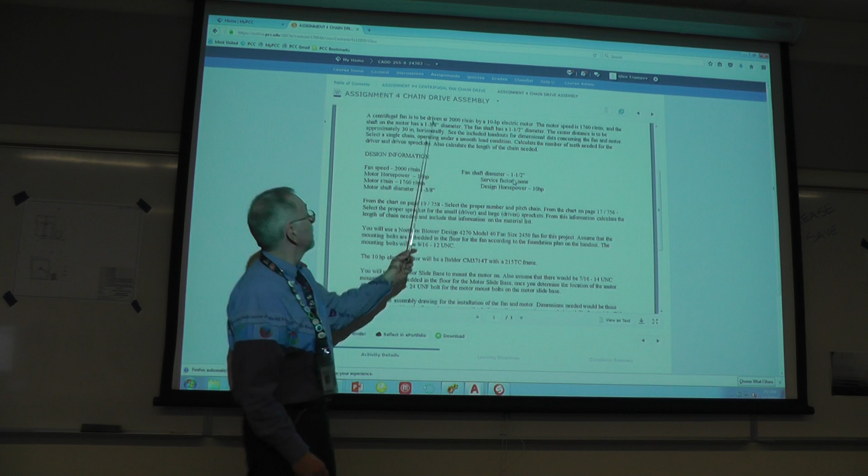Now, the fan is driven at 2,000 RPM. The motor is 1760. Which shaft operates faster? The fan shaft does. Which shaft gets the smaller number of teeth? The fan shaft will.

This is out of the ordinary from most design situations where the motor is running much faster than the piece of equipment is. So we're taking the motor and we're increasing the speed for the fan to get it up to its proper operating speed. So the small sprocket goes on the fan shaft. Other than that, it's just straightforward stuff.

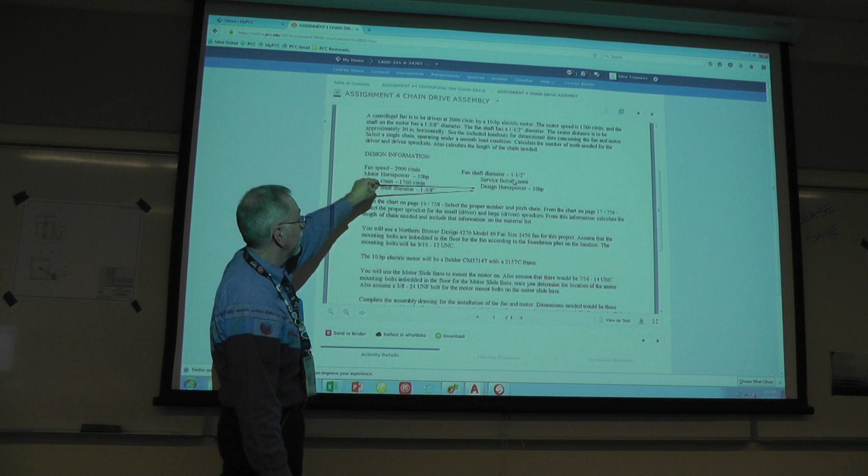So here's the design information set up for you. There's no service factor. The design horsepower is 10. There's no adjustment to that. So you've got the charts to work off of.

Now, originally when I had this project going, I had everybody do the drawings based on the dimensional data. That's not an uncommon thing for you to do as a drafter, to get a catalog of a piece of equipment and make a reasonably accurate drawing of the piece of equipment and the fan. To take stress off your life and probably stress off my life,

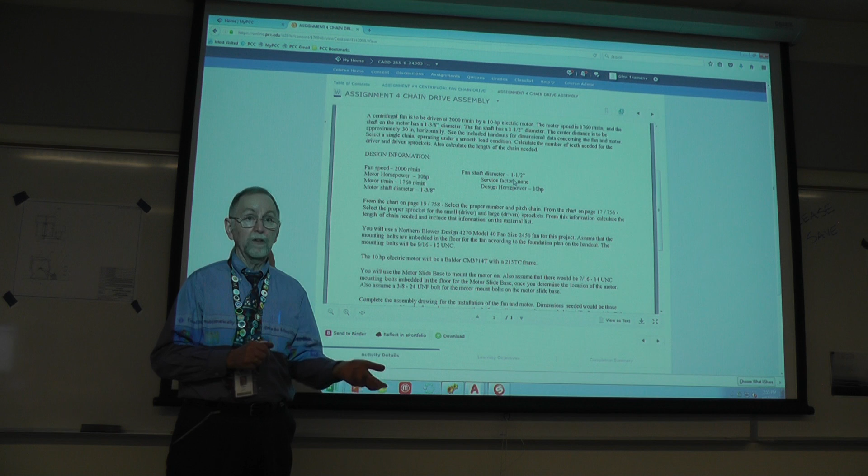I am going to give you, once again, the drawing of the assembly of the fan and the motor, and you're going to fill in the blanks, calculating the number of teeth in the sprockets, adding those to a bill of material, completing the bill of material based on certain assumptions that we've made. I'm going to go through and show you what you would have worked with as a drafter, and how complicated it can be sometimes, and I'm just trying to make your life easier. You're welcome.

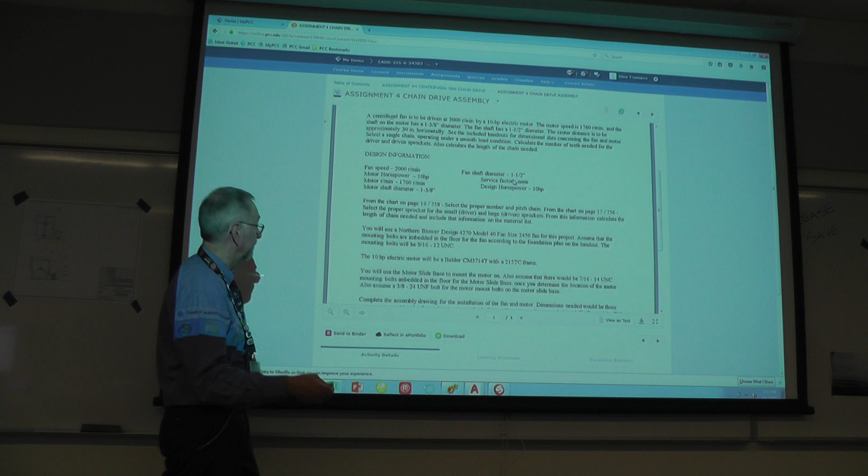All right, so there's a particular model number and fan size number for the project. We would have made an assumption that the mounting bolts for the fan were already in the concrete floor where this fan was going to be situated. There was dimensional data to do that. So I could have taken the dimensional data from the fan information, made an installation drawing, and marked out where the bolts were supposed to be. So we make that assumption.

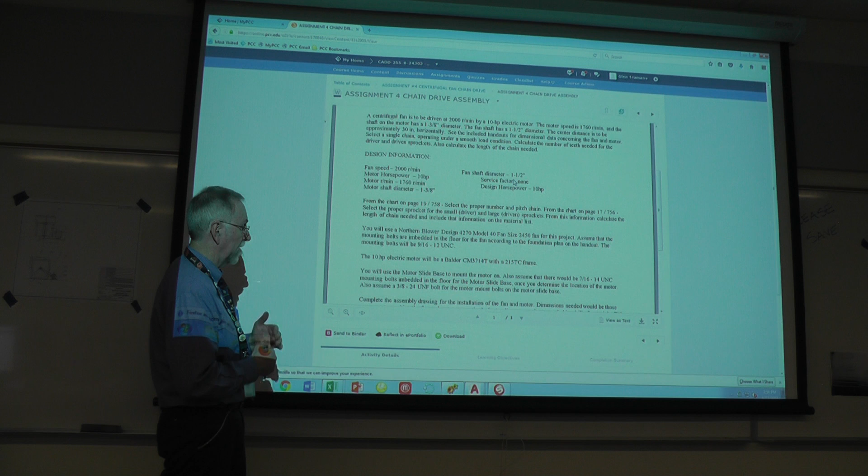The 10 horsepower electric motor is a certain brand and certain model number, and it has a certain frame associated with that. There was also a motor base to mount the motor on, and we could assume that there would be 7/16-14 UNC mounting bolts embedded in the floor for the motor slide base once you determined the location of the motor, and then a 3/8-24 UNF bolt for the motor mount bolts on the motor slide base also came with the motor base. That was information that was included in the catalog.

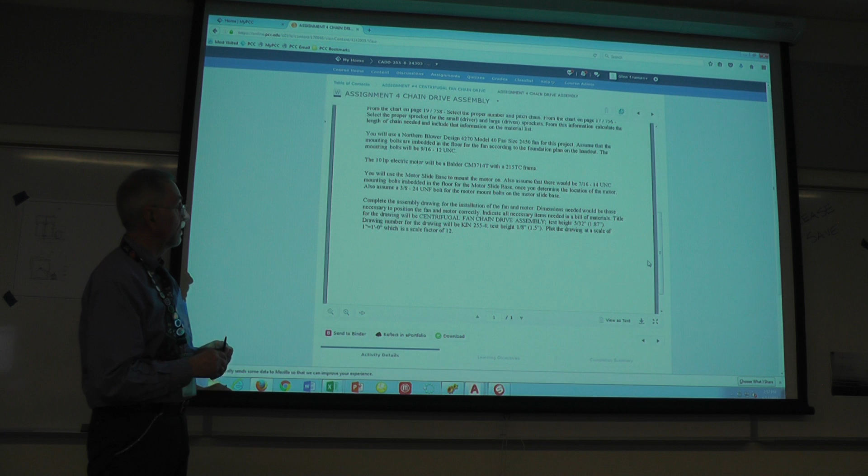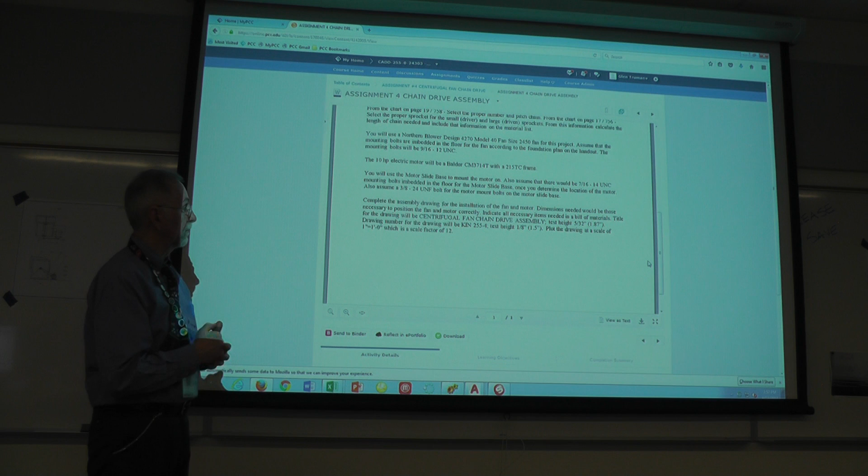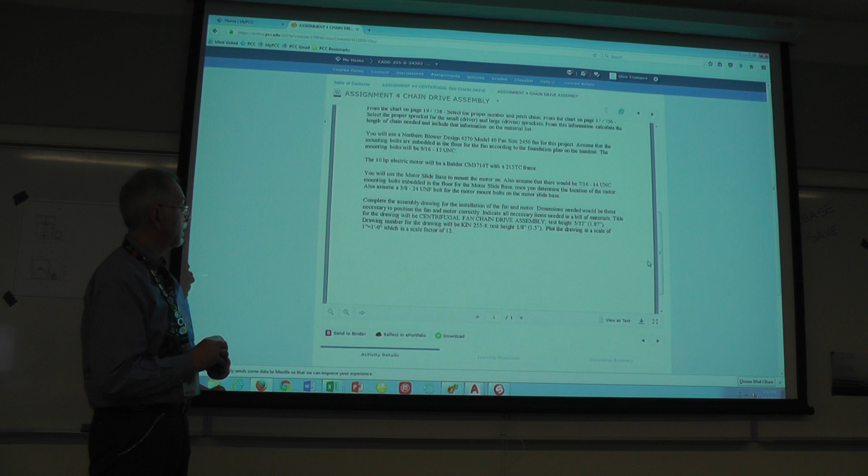So your task is then to complete the assembly drawing for installation of the fan and motor. Dimensions needed would be those necessary to position the fan and motor correctly. Indicate all necessary items needed in a bill of material. Title is going to be Centrifugal Fan Chain Drive Assembly. The text height is 5/32 of an inch, standard for this class for this term. Drawing number is going to be KIN 255-4. Text height for the drawing number is 1/8 inch. Plot the drawing at a scale of 1 inch equals 1 foot, which is a scale factor of 12.

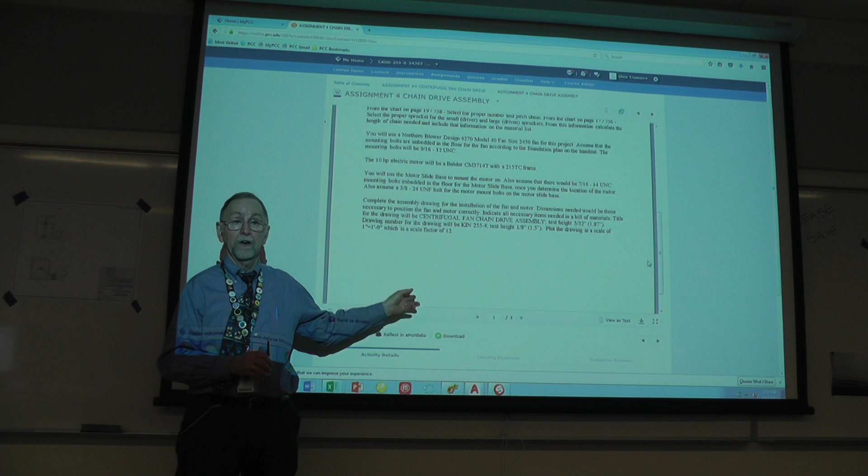Now we're back to a discussion of, do I want to do all of this in model space? Or do I want to take the existing drawing that you'll work from, use that, and do insertion of the title block in layout space? I'm leaving the decision up to you. I've gone through that discussion, and it should be pretty much the same except for the scale factor. Scale factor on the first one was 4. This scale factor is 12. Diameter of the item balloons is 5/16 of an inch.

0.3125 multiplied by 12 gives you the diameter of the item balloons that would exist on the drawing in order for them to plot out at 5/16 of an inch height. Height of the text in the bill of material is 0.1. You multiply that by 12. You actually get a height of 1.2 if you put the title block into model space and fill the bill of material in model space.

If you insert the title block in layout space and fill it in layout space, the height of the text is 0.1. Some people like to do it that way. Other people want to do the scale factor. You need to be able to do it both ways. You might end up working in a company that doesn't have AutoCAD 2017, soon to be probably 2018. You may be working with AutoCAD 2008, and it doesn't do annotative and it doesn't do all that kind of stuff. You need to be ready to do some scale factoring.

Plus, if you're looking at particular sizes and distances in model space, you have to then multiply that by your scale factor of your drawing scale. Otherwise, it's going to be little teeny tiny offsets or something. So you have to be aware of all that. That's why we're doing bigger drawings in this class.

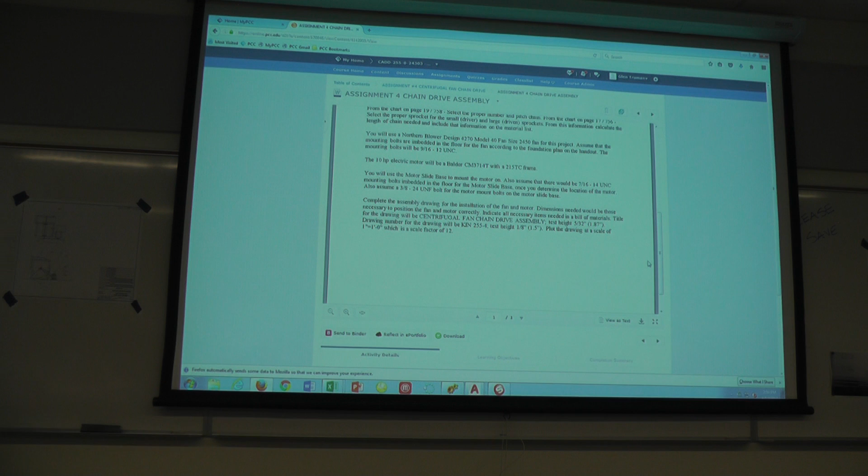All right. There is a PDF of what the drawing will look like. That's down at the bottom where it says chain drive assembly and a PDF symbol. I'm only going to show you these because this is what you would have worked with or might work with as a drafter. They're for your information. These have already been drawn as an AutoCAD drawing that I'm going to have to make available to you. I didn't put it in there. I will get that in.

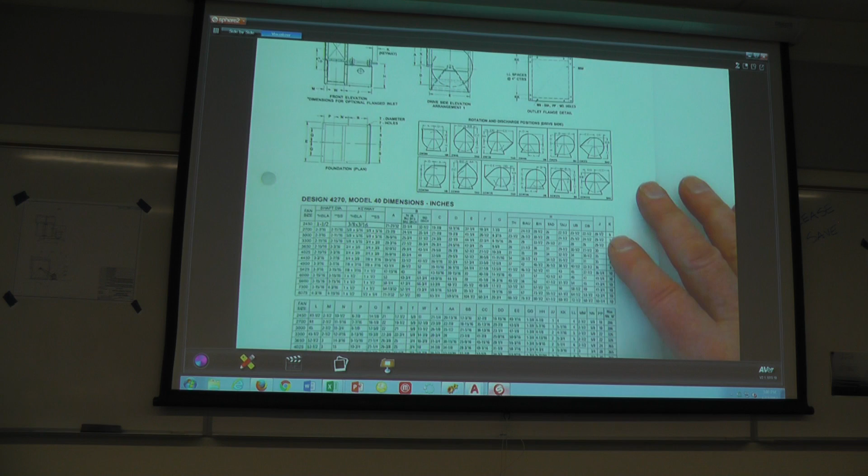Okay, so if I actually looked at the information on a chain on the fan, I've downloaded that, put that in there, and it ends up looking like this. Catalog page. Yep. Looks like this. So there's different configurations. So I've got a lot of letters. I would be using the 2450. There's a shaft diameter. There's a keyway in this shaft that's 3/8 by 3/16.

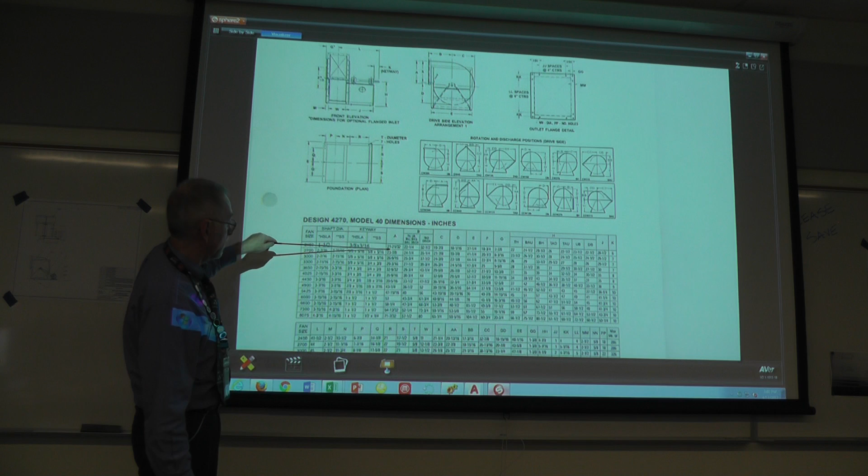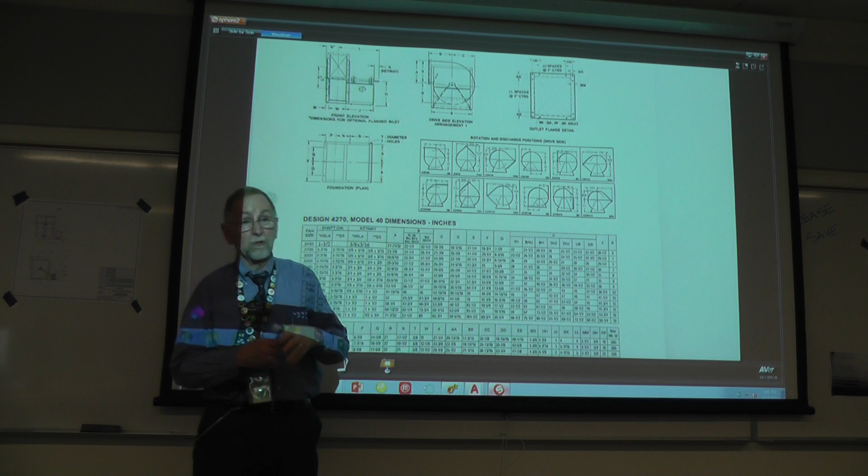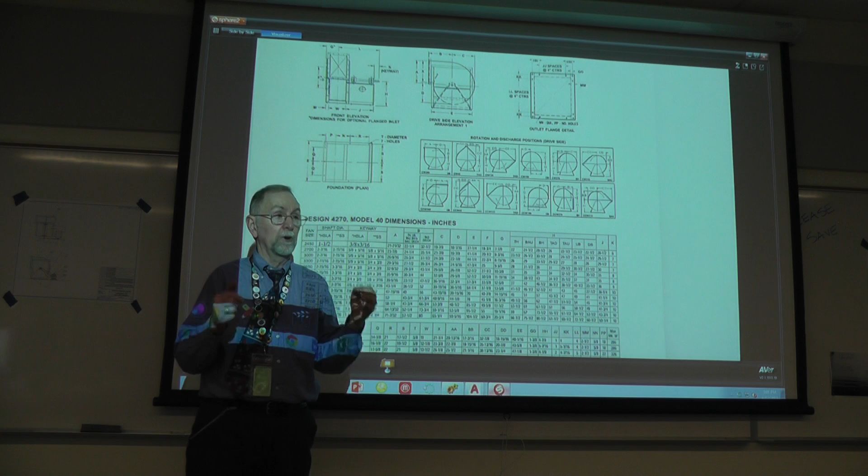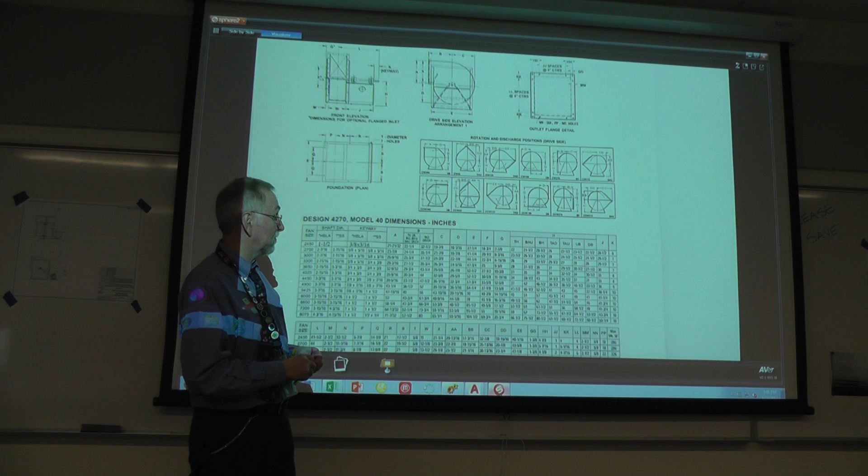There's a dimension A. So I would have to take this dimension A, and I'd have to do a drawing based off of that 21 and a half inches to be able to draw the drawing. I'd have to look at the E. It didn't really tell me how big the little angle iron brackets were, so I'd have to kind of scale some of that drawing or call up a salesman and ask him, hey, what's the size of this angle bracket that I'm maybe using in this drawing? That's what made this particular project somewhat complicated, and everybody took a lot of extra time and frustration and anxiety and angst. So it's been done. But this is what you possibly would have to work with on that.

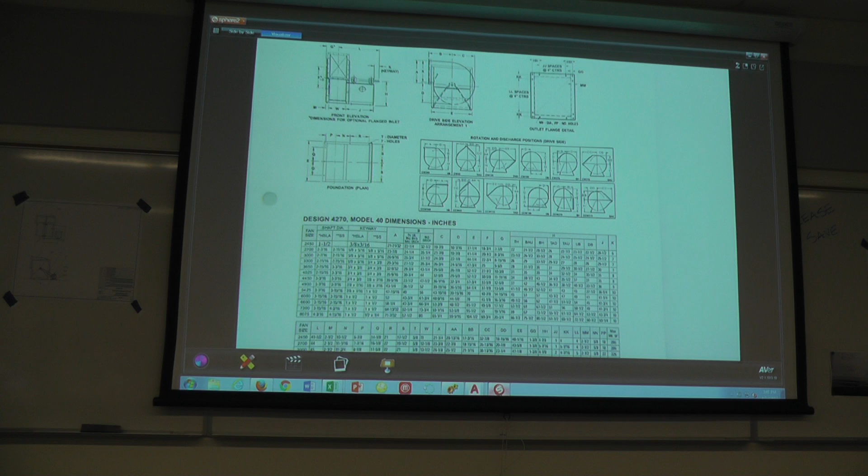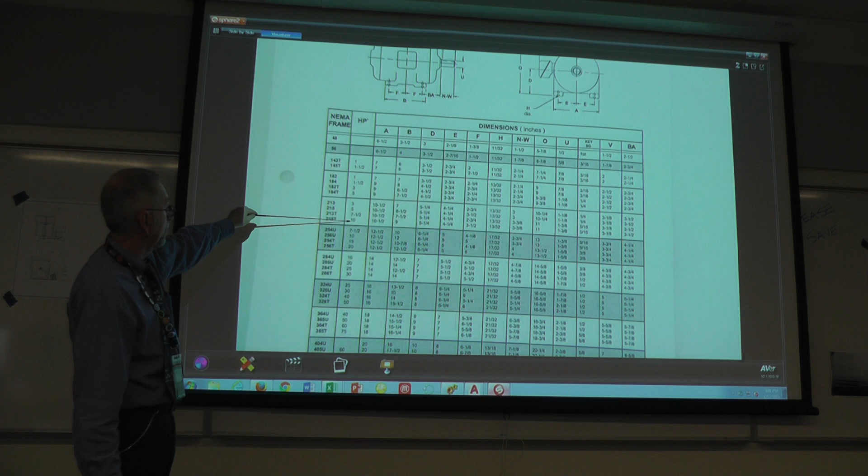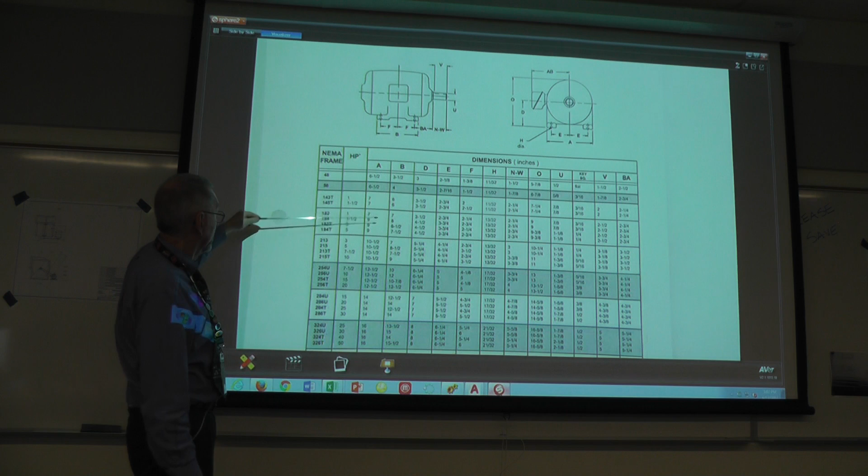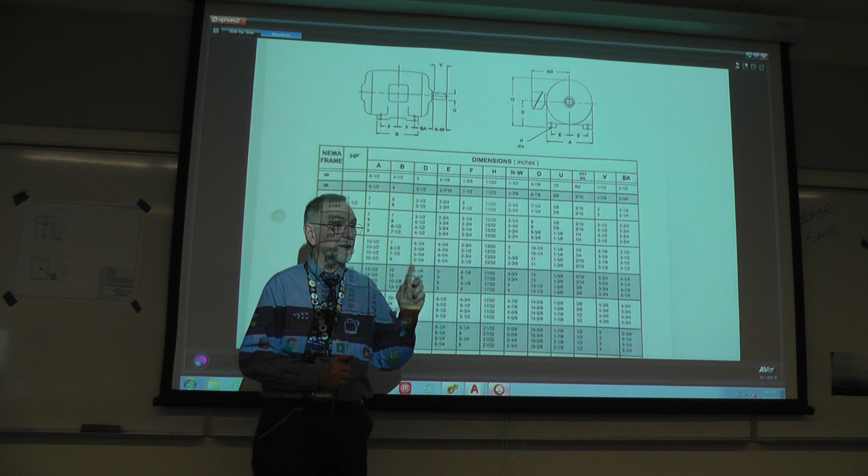There was also some basic information on the frame of the drawing. It was a 215T frame. So I've got dimensions. Horsepower was 10. I got a dimension for A. This is what I would have to use to try to draw as reasonable a facsimile of the motor as possible. I'd have very limited information in here. I'd have a few basic dimensions. I'd have to do the best I could to come up with a drawing. Or I go to Baldor's website and I see if they have a 3D model of a motor, which they did.

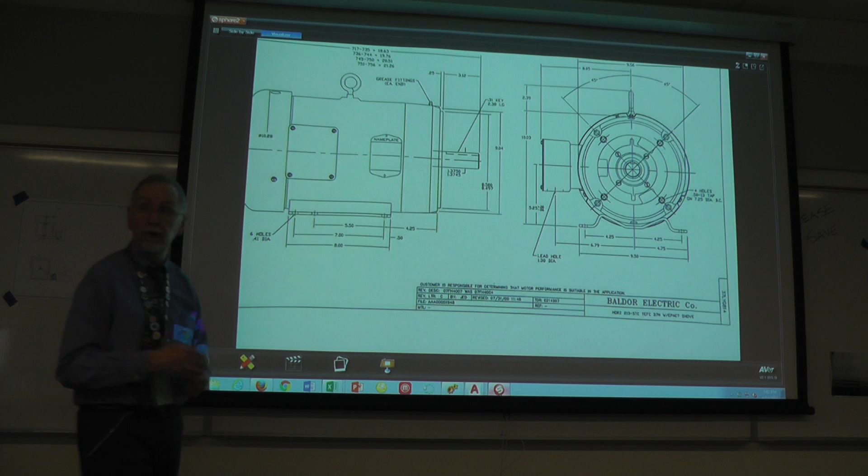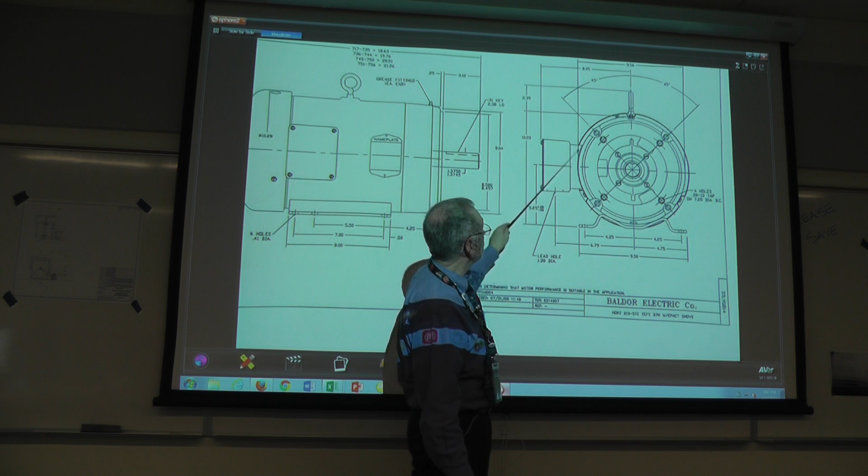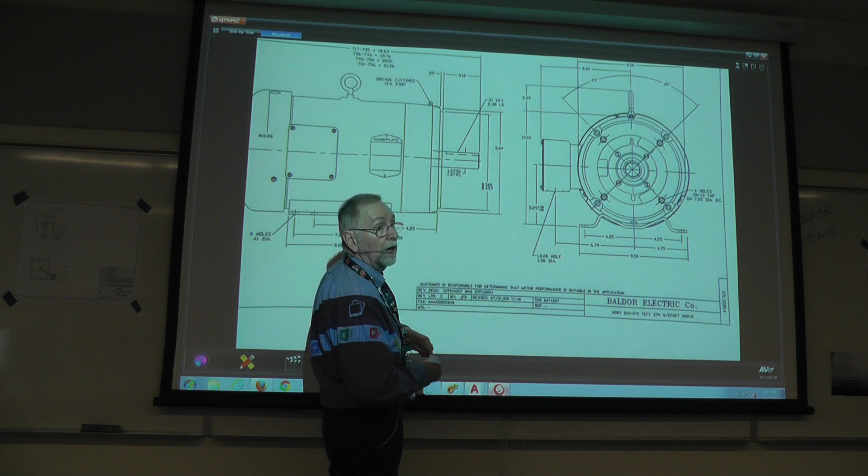And on their website, there was an actual AutoCAD drawing that was downloadable. So I went in and I'm going, well, there's an awful lot of detail in this end view here that exists in my drawing. And by the time I add some line weights into here, almost all that detail is just going to basically disappear. It's going to be this big blob of black ink. So I went in there and took out a lot of this extraneous detail and used just the basics of it for the drawing. And I kind of use this to try to come up with a top view. Here's your shaft diameter, 1 3/8 of an inch. So I've got dimensional data that I could use for that.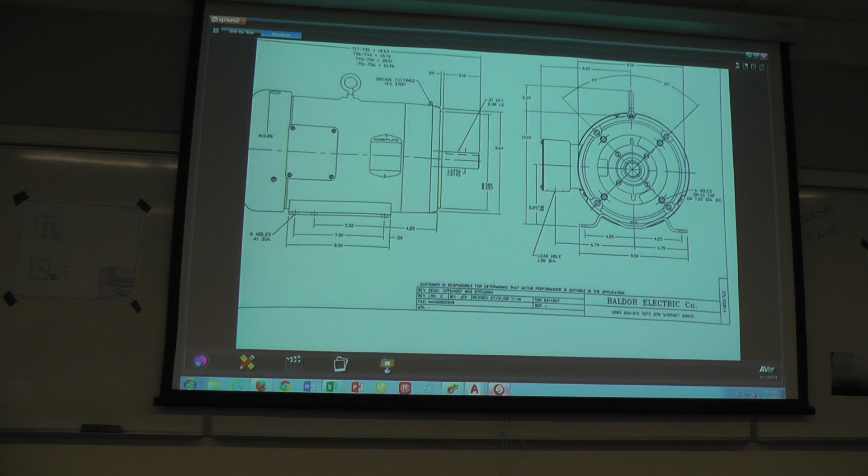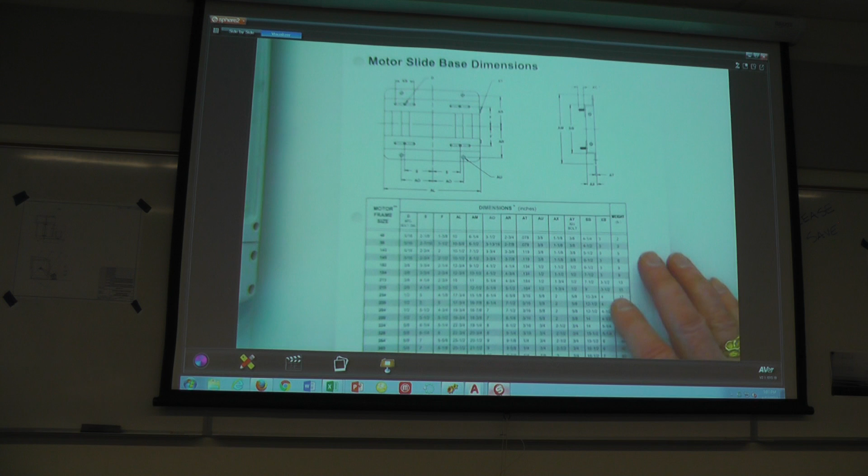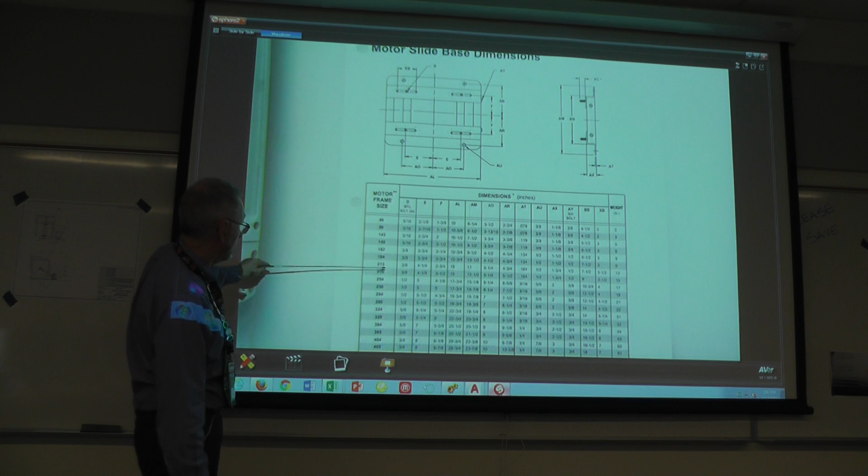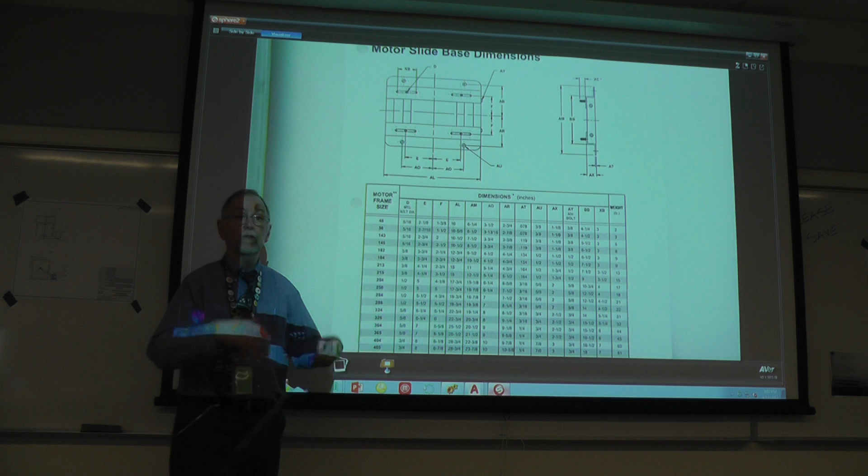And there was also a drawing of the motor base with dimensions. Again, it's something that you'd have to work off of, potentially. So again, I've got a 215 frame, and I've got like the AL dimension for the 215. I'd have to come in here and I'd have to make that 15 inches. I've got AO, which is 5 1/4, so I'm using those dimensions. This little illustration to make an AutoCAD drawing of my base to put the motor on and situate it.

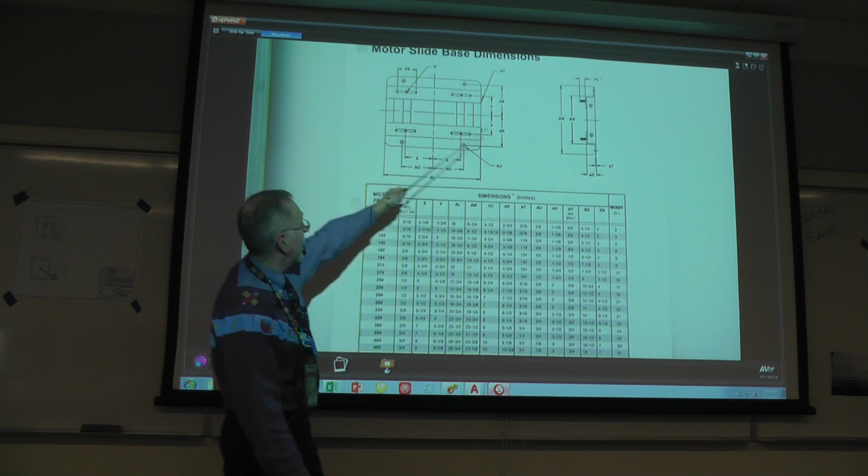Right here, this is actually the D dimension up here, that's a little mounting bolt that came along. So the D dimension mounting bolt diameter was 3/8 of an inch, and I made it a unified national fine, because this is a motor that has vibration, and the base is going to have a certain amount of vibration. I would put a fine thread in there.

It has more threads to the inch, which theoretically has more holding power, which theoretically means the nuts, even with lock washers, wouldn't have as much of an opportunity to loosen up and back out. So that's why I picked the 3/8, I think it was 24 UNF. That was the reasoning for that.

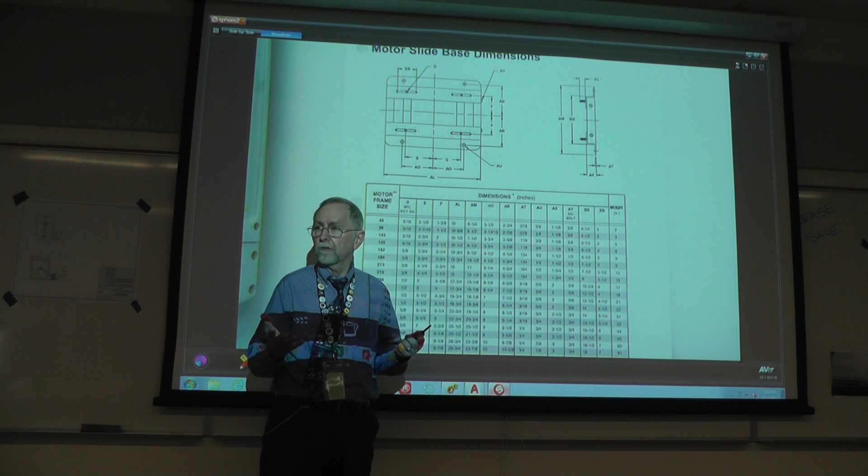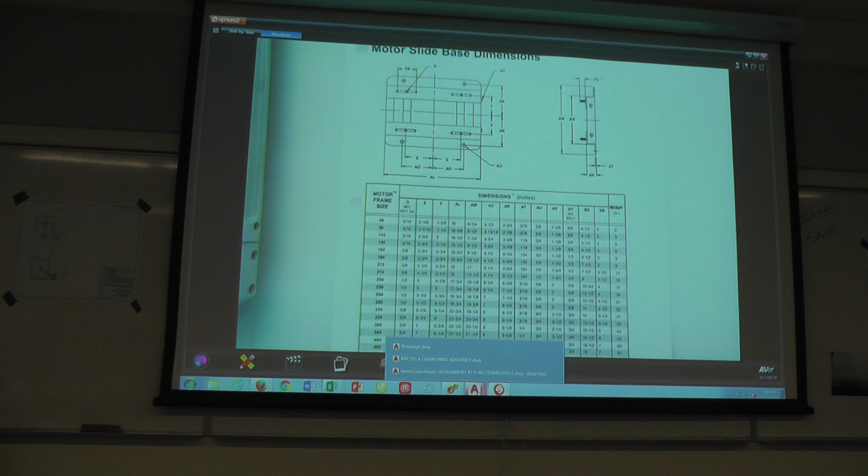And then there was information on the frame, which gets you to the point of getting a drawing that ends up looking like this. I have an example up here on the board. You have the PDF of it. The dimensions, since this is already kind of established, I went ahead and put the dimensions on there.

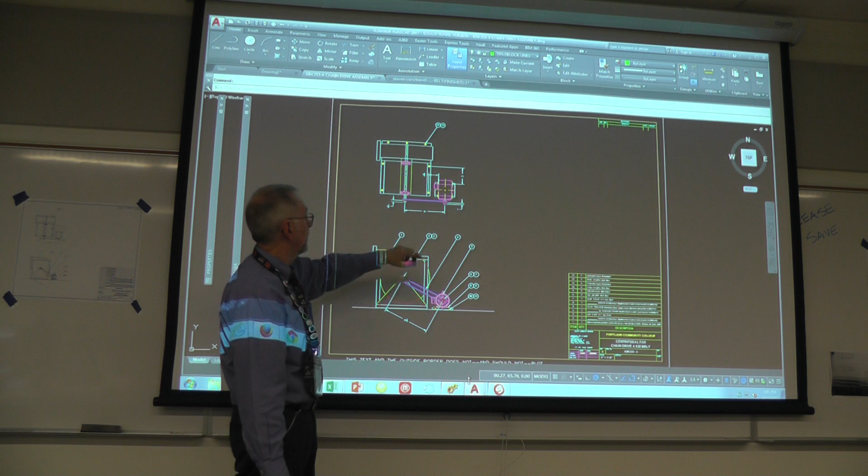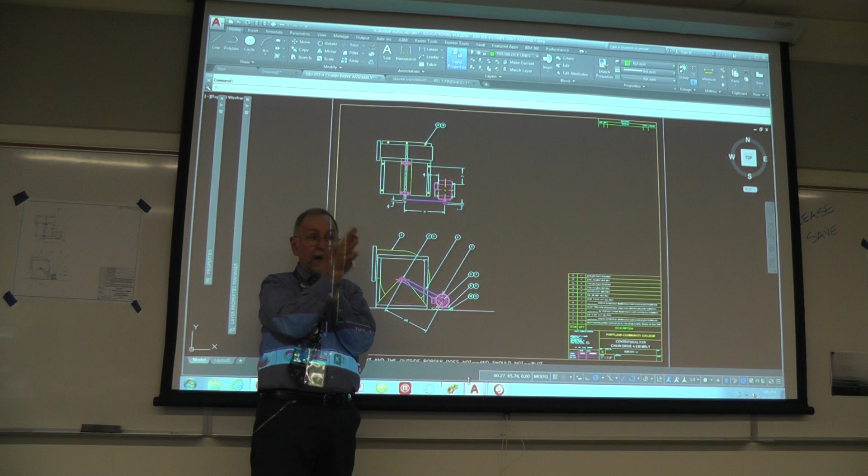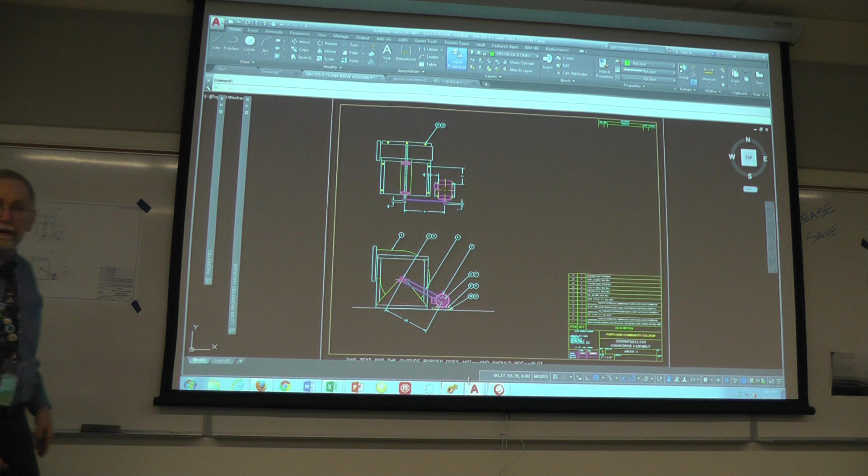There's a dimension from the end of the shaft to where the hub would go on the sprockets, theoretically being that this is going to line up so that you keep that chain from being skewed and wearing out prematurely. You can see that even with taking out a lot of that little detail, this ends up looking like sort of a black area, but I'd use really light line weights on it so you can come up and take a look at the detail.

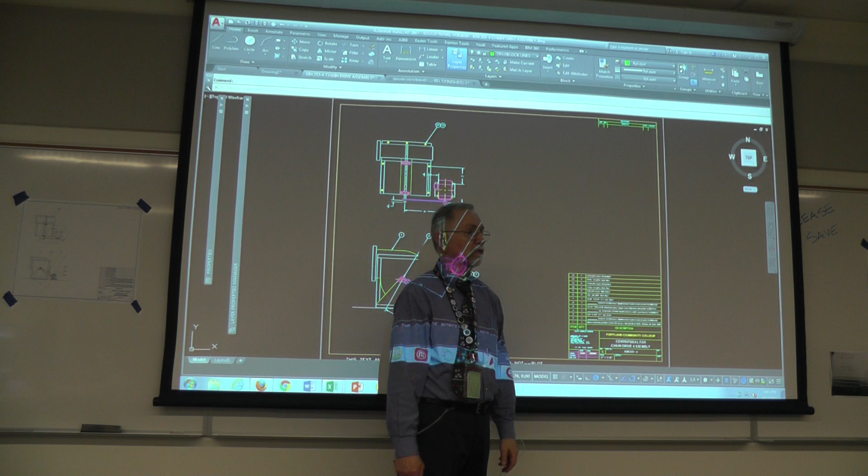I have left blanks in here for you to determine how many teeth and what the size of the chain is going to be. All the rest of the information is pretty well established in there, so you shouldn't have that much trouble. And you've got a lot of time to work on this to get it in and get me a plot. Part of the assignment is to do a plot, if at all possible, but there's a few that are having struggles getting plots to me. And so that's the assignment. I just haven't put the drawing up there available for you yet.

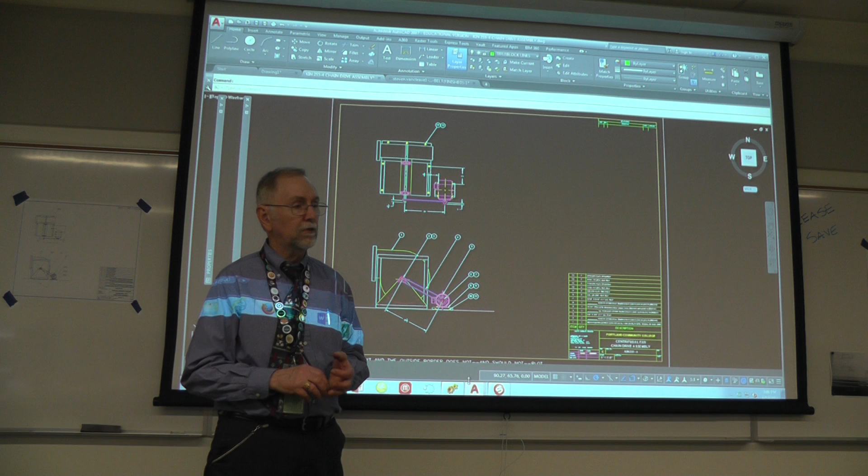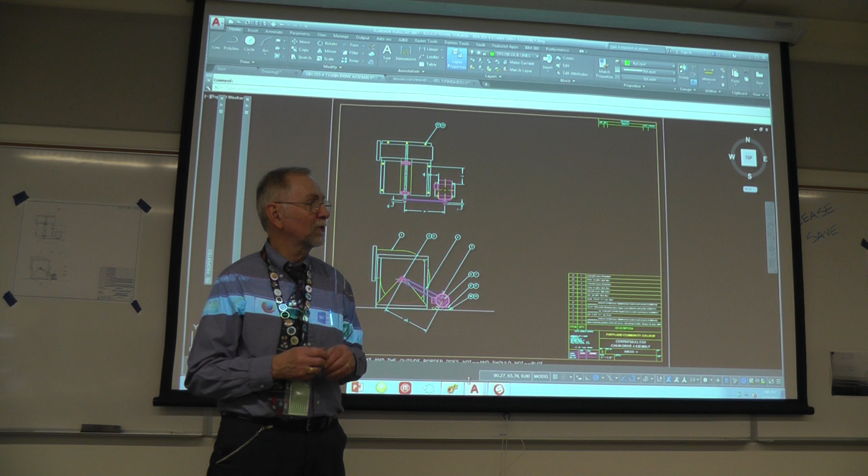Questions? Too much information for questions yet. Yes, Red? So you said the 4 PDFs in the content section are for future reference and personal edification that we wouldn't need in this particular project? Correct. The 2 DWG files above those, are those also for future edification, or are those something we're using?

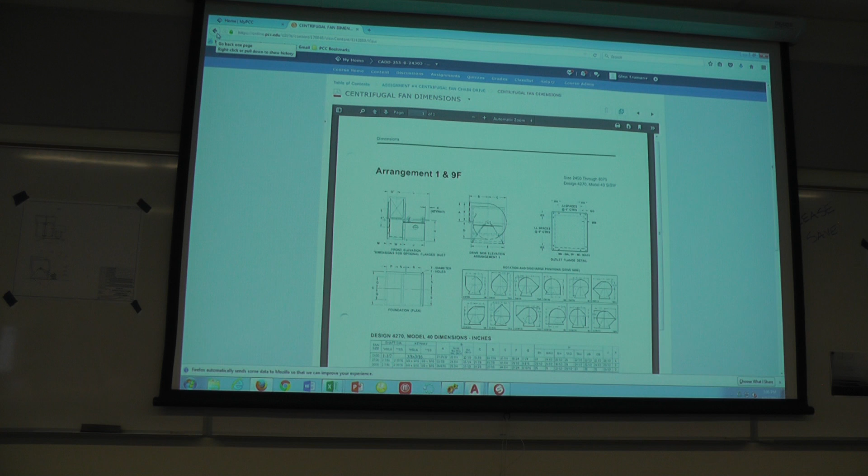Let's see, let me go back here. Like McMaster, those were drawings that you would have used to create the drawing. This fan shaft bearing was in the drawing, and I downloaded it off of McMaster-Carr, and the electric motor was that little sheet that I showed you up here. Right. If you were creating the drawing and you had to create the fan drawing and the motor base, that would have been what you would have used. Okay, so that's kind of the same category as the 4 PDFs.

Yeah, basically all of these are for your information to go back and look at and wipe your brow and go, wow, I sure am glad I didn't have to do all that stuff. I just keep them in a separate file. Yeah. That's all I wanted to know. Somehow I just missed getting the actual drawing file in there for you, which I'll have to go over to my office and do because I can't do it from in here. So yeah, the actual drawing's missing. Yeah, the actual drawing to work from.

But you've got calculations to work on anyway. You've got an assignment in D2L to download. It's only one calculation. Yeah, assignment number 3, chain drive. Assignment number 3, chain drive calculation. Yep. I'm sure there will be other questions that will come up.